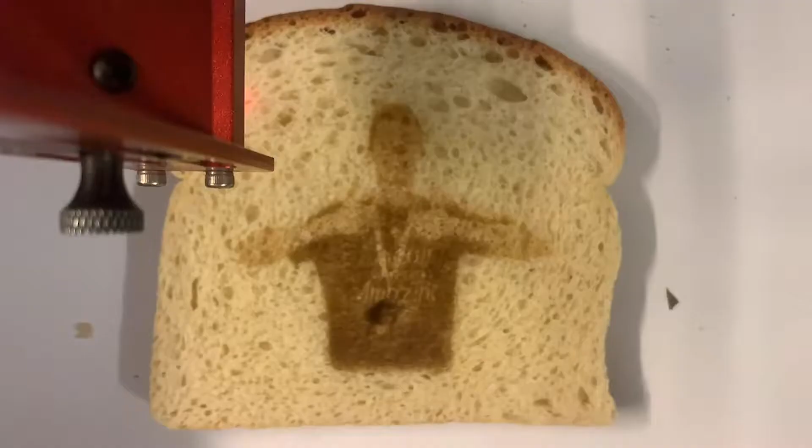This will be the first installment of what we're calling the Noah Builds a 3D Printer series. Name pending, because that's not that great. And in this episode I'm going to be taking you through my process up until where we are right now, because I've been working on this project for a really long time, and I think it would be pretty cool to bring it to all of you guys.

The first thing that I think it's important for us to talk about is why I decided to build a 3D printer, because they're pretty readily available online, and the prices have been coming down substantially. So why would I go out and say I want to build a 3D printer using an entirely custom design that I create? And really the inspiration behind that was I wanted to take on a pretty hard challenge,

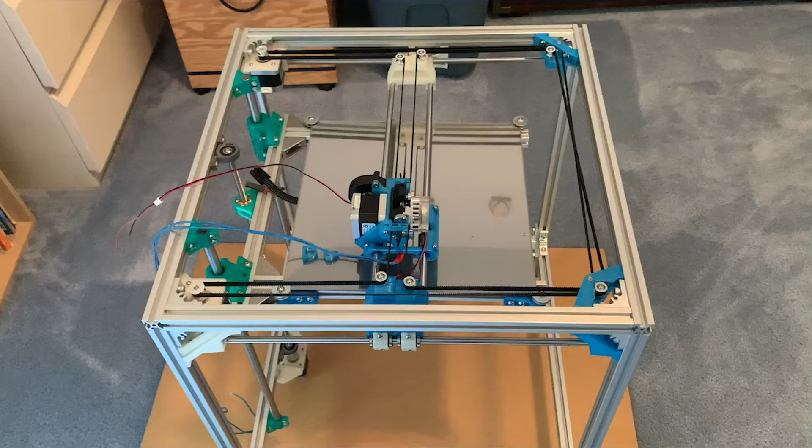because sure, I could design this thing or that thing in Tinkercad or Fusion 360, but I wanted to take on something really, really hard. So I said, okay, I'm going to custom design a 3D printer by myself with no external help. So that's what I did. I started in Fusion 360 and really just began with the frame and kind of filled in all the components as it became necessary.

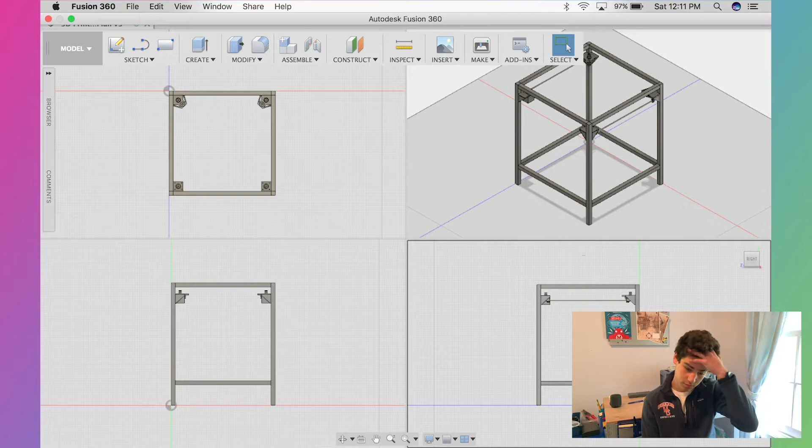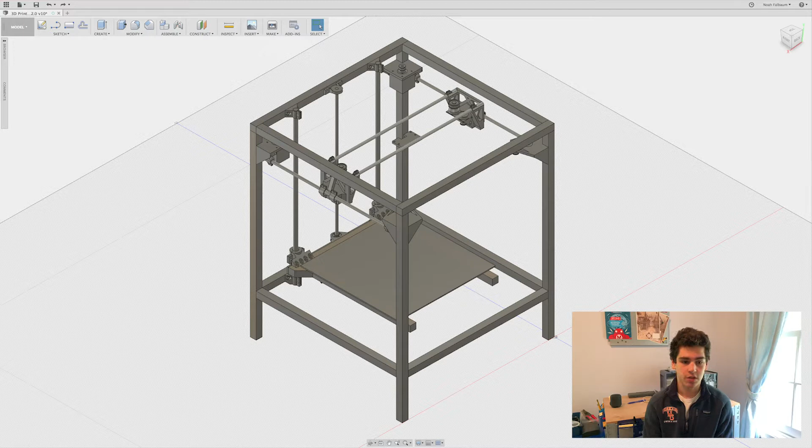Some basics about the printer that I decided to build. I wanted a pretty large build volume because I had bought a 3D printer before starting the project, but its build plate was about 6 inches by 6 inches, so pretty small, and the materials available to use with that printer were really limited. I had to use the filament that company provided, and I couldn't really control any of the settings,

so I wanted to completely design and be able to control every aspect of this machine, and that began with the original tech specs, which I decided I wanted it to be big, accurate, and very versatile in terms of filament and any other user settings you could want to use. So that led me to settle on a box style 3D printer, which basically means it's a box, pretty self-explanatory, with a build plate of 1 foot by 1 foot.

So the build plate itself is 4 times larger than the one I'm used to, and the build volume is, if I'm doing the math right, 8 times larger. I also wanted to make sure there was a heated bed, because that impacts what types of material you can use with the printer.

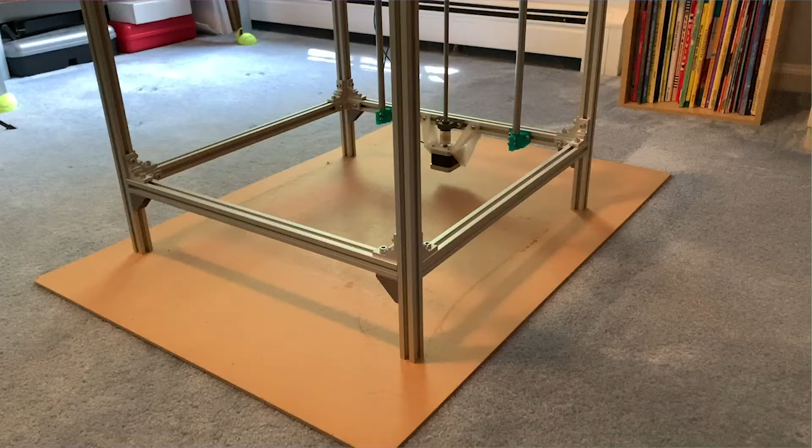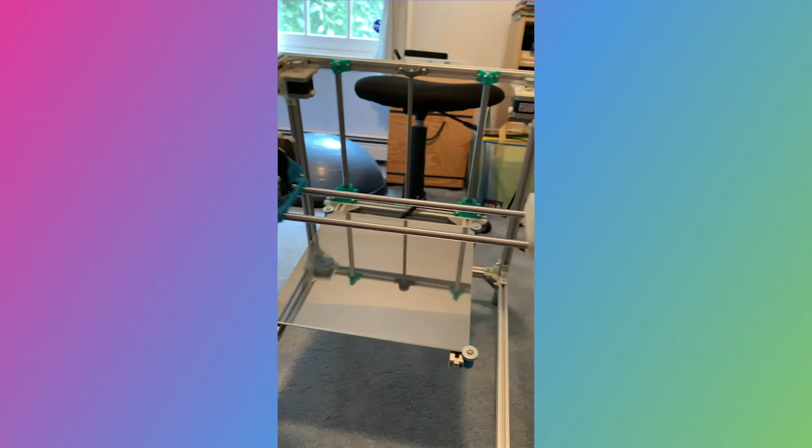Now moving on to the belt style, or the kinematic style. As I said, it's a box frame, which means that the extruder head, which is what puts out the plastic, is going to move in the X and Y directions. So that's like if you're in math class and you're graphing something, you have your X-axis and you have your Y-axis. So it's a 2D plane. That's where the extruder moves. And then the build plate will move in the Z direction, which is up and down.

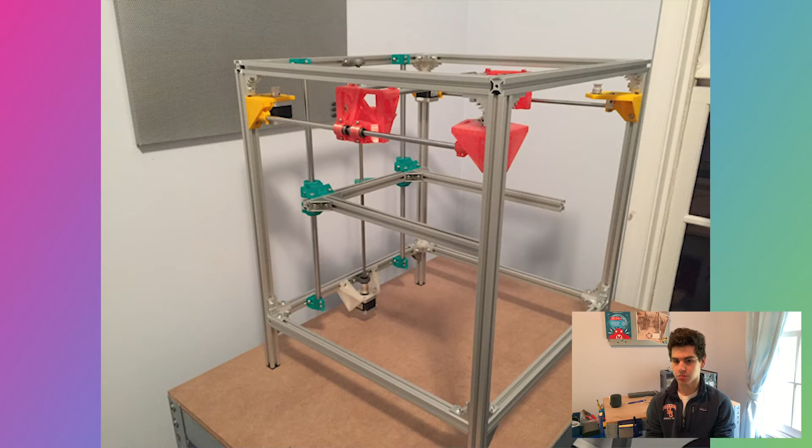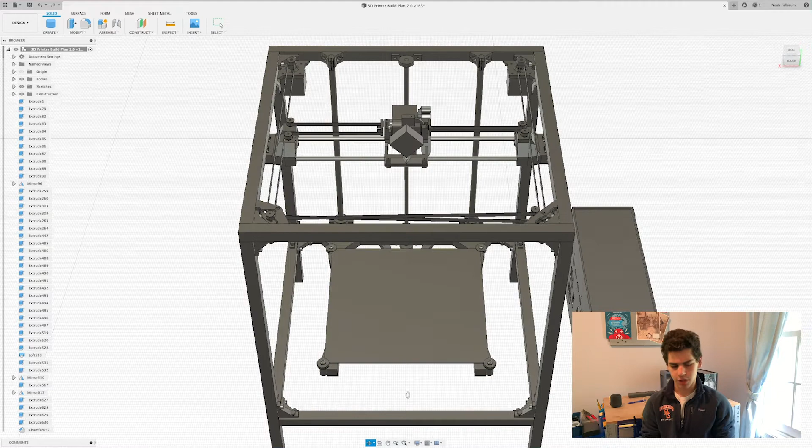And each of those types of motion is controlled by different systems in the printer. So I had to obviously design and model and then put them onto the frame. So let's start with the Z, because that's kind of the simplest one. The Z axis is controlled by a screw. As the screw turns, the build plate is moved up and down by kind of a nut, but not really, on the screw. The screw is turned by a motor, which is controlled by a control board, which really allows the printer to function. We're actually not up to wiring the thing yet, but when we do, we'll bring all that coverage to you.

Now the X and Y axes are also controlled by motors, but motors that are driving timing belts instead of a screw. And in a box frame 3D printer, there are a lot of different belt styles that you can use. One belt style has one motor controlling the X-axis and one motor controlling the Y-axis independently. But I decided that I was going to use something called Core XY, which is where both motors control both the X and the Y axes. And it's kind of hard to explain, but I'm going to show you a diagram that will demonstrate it a little more clearly.

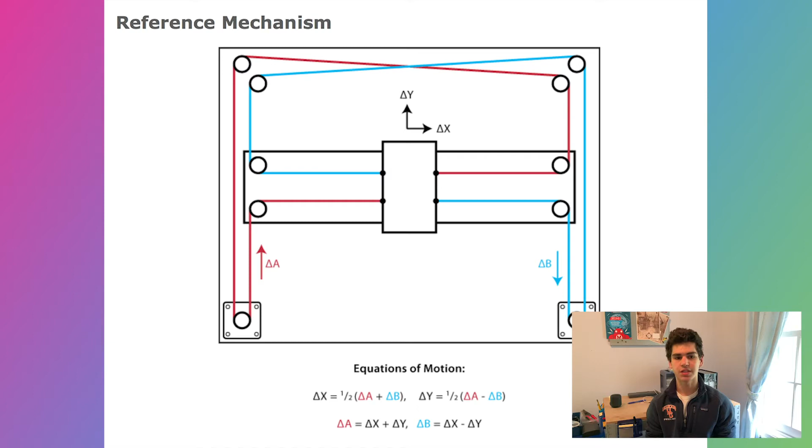Basically, the benefit of a Core XY system is, if you think about it, when you're printing something, most of what you're doing is straight lines, either forward and back or side to side. And what Core XY does is it makes those key movements controlled by both motors. So it allows those movements to be a lot faster because both motors are acting on them at the same time.

Versus in a more standard system where one motor controls X and one motor controls Y, only one motor is acting when the print head is moving on those very standard directions. So that's the benefit. It's a bit of a complicated way to run the timing belts, but we figured it out eventually.

Unlike my original printer, this one has a glass print surface, which means that the bottom of the prints is going to be a lot smoother and they're going to stick down a lot better while it's printing. You're not going to get any of those warping effects or print failures due to sliding, which you can get on a metal non-heated print bed or one that you cover with tape.

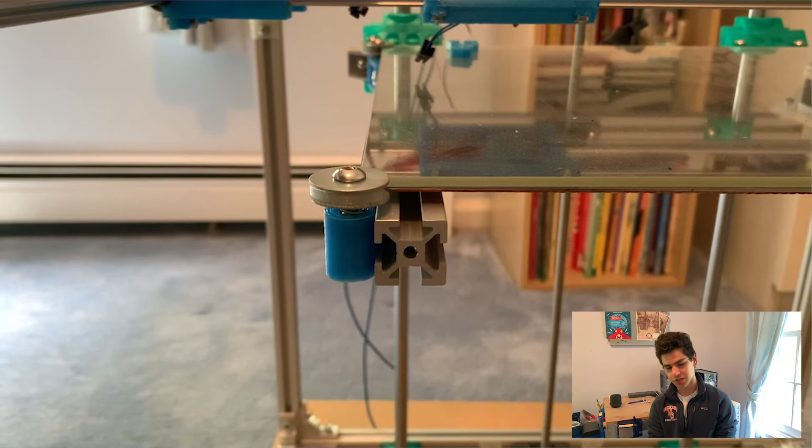I also had to design a system that would allow me to level the print bed, and that's really important because as the print head moves along, if the print surface is not level, then the distance between the nozzle and the print surface can change, which will affect how well the filament is able to stick down.

So that's simply controlled by some screws with springs on them. So as you tighten the screw, the bed moves down. As you loosen the screw, the bed moves up. And that allows you to change the location of 4 different points on the bed.

The printer itself has at least 30 custom designed parts that I have modeled myself over the last few years to make it function. The parts that I needed to order were really limited to the metal and electronic components. So in terms of metal, I needed to order the aluminum extrusion pieces that I used for the frame, any screws or bolts.

The X, Y, and Z axes are guided by steel rods that bearings run along. So that allows for smooth and controlled and stable motion. So obviously I needed to order those because they needed to be really, really precisely machined, which is what I did. And all of the belt pulleys and things like that, the smaller bits, are all metal and ordered.

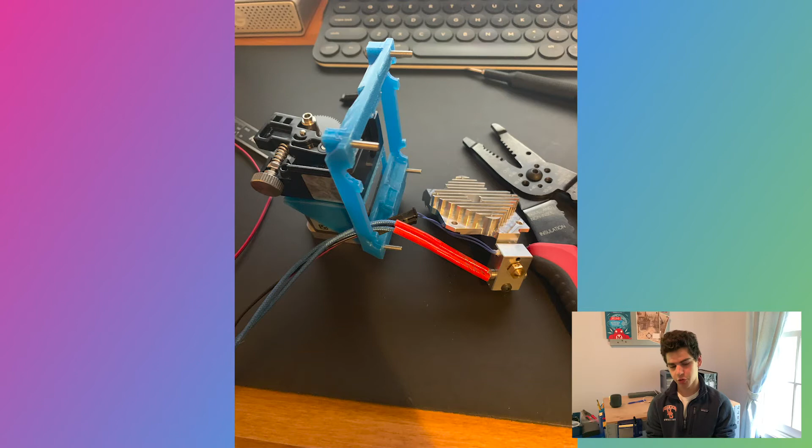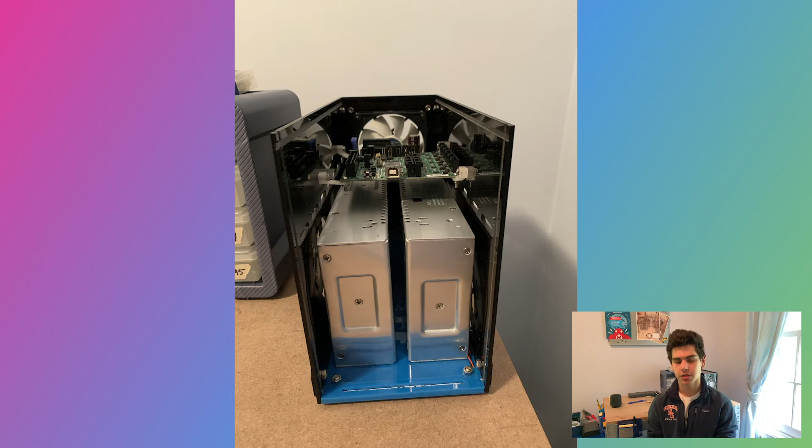And as for electronics, the glass print surface and the heat bed, the extruder, any cooling fans, and most importantly, the control board, which really coordinates this whole thing. It's the brains of the operation. That was, of course, ordered online, as well as the power supplies, which are what convert the power that we get from the wall to work with the control board and, as a result, the printer itself.

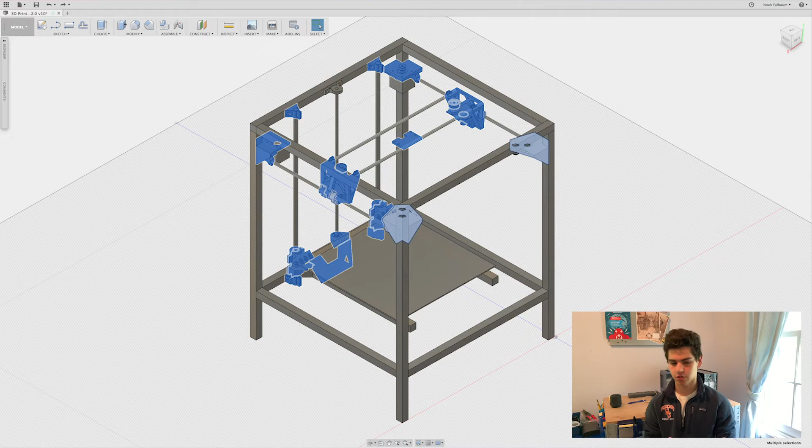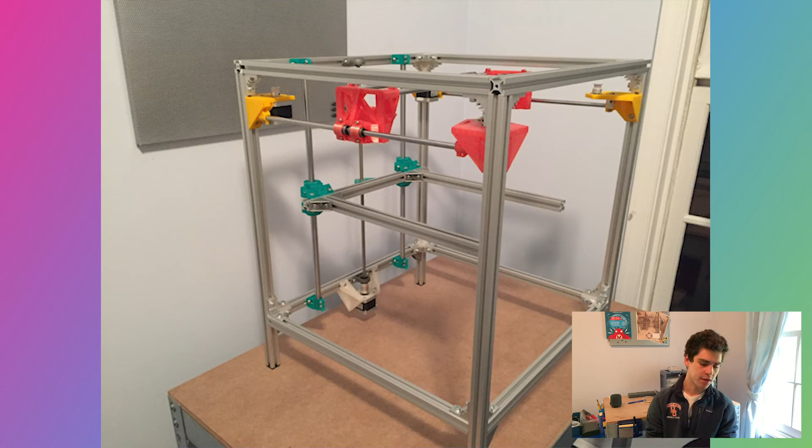In terms of the parts that I designed, we have the extruder mount, we have the pulley mounts for the X and Y axes that control where the belts run. We have all the mounting brackets for the rods that control the X, Y, and Z motion. We have the motor mounts for all of the specific motion components. We have mounts that attach the print bed to the Z rods that control its movement up and down.

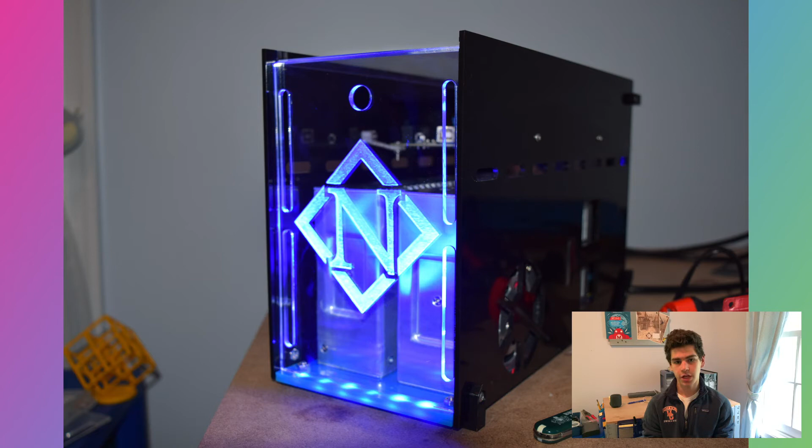We have some bracket pieces on the control box, and we'll even have some laser cut pieces on the control box. The control box itself is a box made out of 1/8 inch acrylic, laser cut, with black on the sides and back, and then we have clear on top and on the front so that you can kind of see what's going on inside.

Electronics right now are pretty minimal. Very little wiring has been done. I have wired the 12-volt power supply, and as a result I have a cooling fan inside of the control box that is supposed to keep everything cool once it's running, but obviously it's not running yet, so just the fan works. And we also have some pretty cool lights on the outside, because why not? And as you see, it even turns on. Pretty cool. That's all we got though.

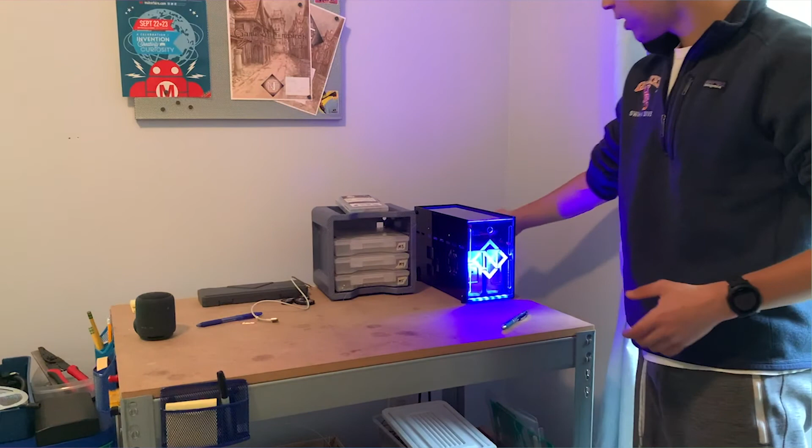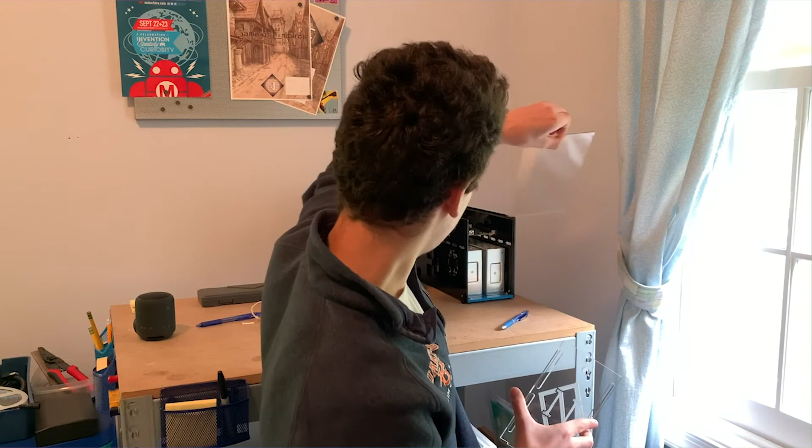And once that turns off, the control box is also designed to be easily modified once it's all put together. So with that in mind, these clear pieces can slide out, and then you get easy access to the inside. So pretty cool. Let me just get this back in.

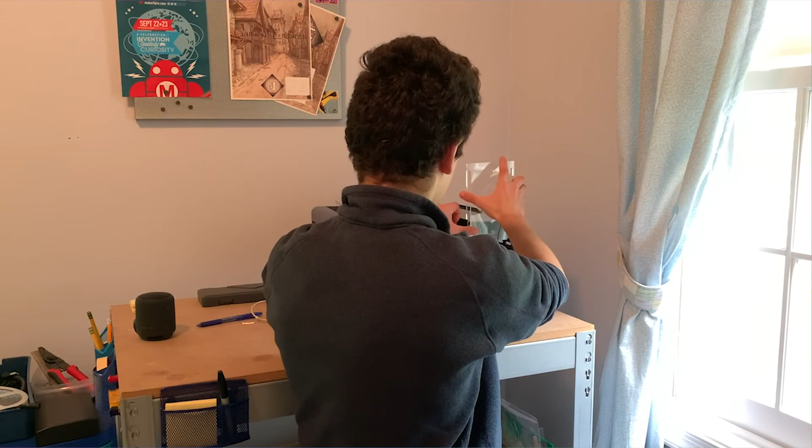Coming up, we really only have a few things left to do. We need to mount the end stop switches, or the limit switches, to each of the 3 axes. Those are what allow the printer to home in to an origin point or a 000 location before beginning any printing operation, and that's what prevents it from crashing into the sides. It knows exactly where it is because of those limit switches, so we need to mount those.

And then all that's left after that is a lot of wiring and some firmware configuration. So we're going to bring you along for the ride, but we're nearly there, so it's a very exciting time to be documenting this and jumping on and getting started. So I hope you have enjoyed learning about all this.